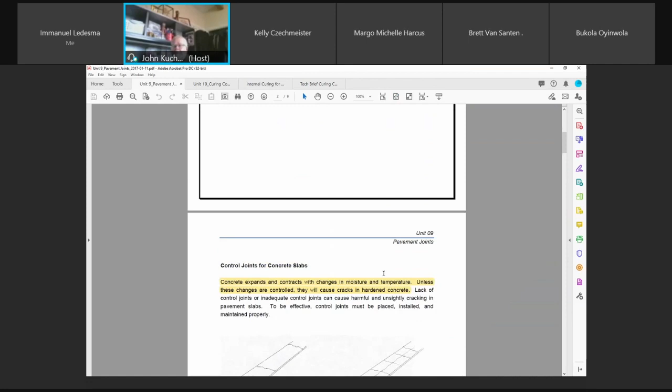We install control joints, pavement joints. Typically it's going to take a little bit of time from when you place that concrete to when you cut it. But also, the next unit we're going to cover curing. You should start curing immediately when you can, because as soon as you place that concrete, it's starting to harden. Remember, hydration takes place as soon as moisture and cement come together.

You'll see this many times. I've noticed this last year and the year before, we did some sidewalk repairs in our small community of St. Adolphe, and I saw the contractor placing concrete sidewalks. Some sections would be maybe 100 feet in length, 30 meters, and then he'd jump to the other part of the sidewalk that needed work, because they didn't replace all the sidewalks, just the ones badly deteriorated. But he had long sections of pavement, sidewalk pavement if you want to call it, and he didn't cure till the end of the day.

That's a no-no. You've got to cure as soon as possible after you're finished. It's starting to shrink, and you want that moisture in there, and it was a hot day. You're getting a lot of moisture loss out of your pavement due to evaporation, whereas you want it in the concrete to hydrate, to react with the cement and create strength. If you ever see that, they should be corrected soon, but in a small town, the superintendent here, I didn't even see him around half the time, so who knows.

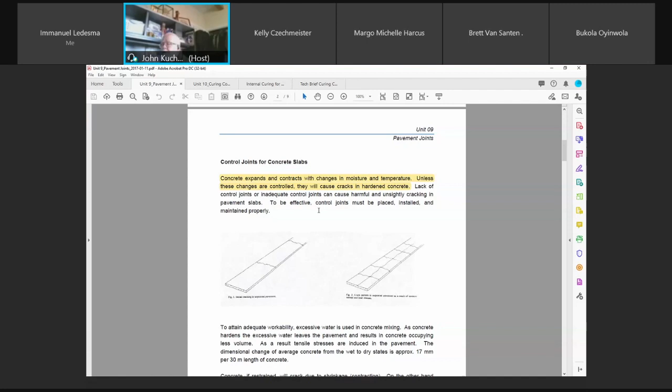Concrete expands and contracts with changes in moisture and temperature. Unless these changes are controlled, they will cause cracks in concrete. You can see here in this sketch, it's restrained along its length, so it wants a volume change, and it's got to let go somewhere.

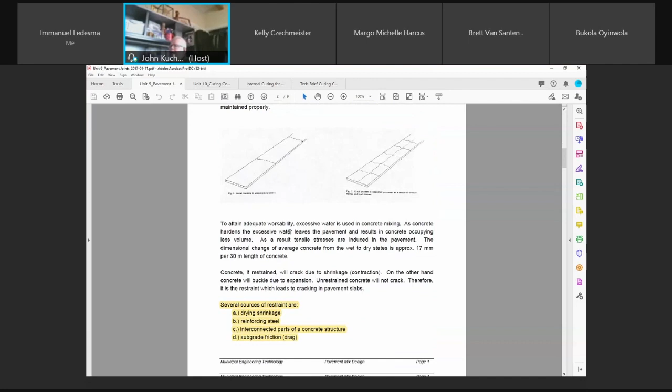To attain adequate workability, excessive water is used in concrete mixing. Based on your last quiz, not too many people got that right—they told me it's great for hydration, but remember, all you need is about a 0.25 to 0.3 water-cement ratio for hydration. The rest of the water is for workability. So that excess water is there to be able to place and finish the concrete.

So you're going to have excess water. And if it evaporates, some of it is obviously going to hydrate with the cement, and you're going to get volume change, and you're going to get cracking. As a result, tensile stresses are induced into the pavement.

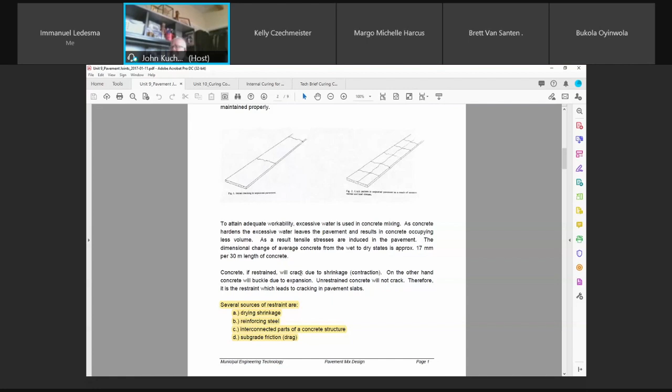The dimensional change of average concrete from the wet to dry state is approximately 17 millimeters for every 30 meters of length. 17 millimeters is about 5/8 of an inch if you're comfortable in imperial, and 30 meters is about 100 feet—so a little more than half an inch per 100 feet. That's a lot. Concrete, if restrained, will crack due to shrinkage, contraction.

On the other hand, concrete will buckle due to expansion. Have any of you guys ever noticed this on a hot day—well, a cloudy hot day is good then, right? Not overly hot, though. Keep in mind high temperatures aren't very good either, because it's going to dry out and suck the water.

But definitely cloudy, cool days are better. And if you have a cool day, you're not going to have a very high relative humidity usually. Cloudy is better, and less wind—no wind—is better too.

So some of you may have been driving home from work or from college, and sometimes you'll see the curb just kind of buckled up. You'll see sidewalks or the sacrificial strips along the median. They'll put concrete pavement there to prevent the grass from dying, because usually the grass on the median or boulevard right next to the curb is shot due to the salt and sand thrown there during de-icing in winter, and vegetation doesn't want to grow there.

So if you've got a median, they'll put concrete almost like a sidewalk—but it's not meant as a sidewalk on a median. That's to prevent the grass from dying from the salt that's thrown up too close. I call them sacrificial strips because you're sacrificing the concrete.

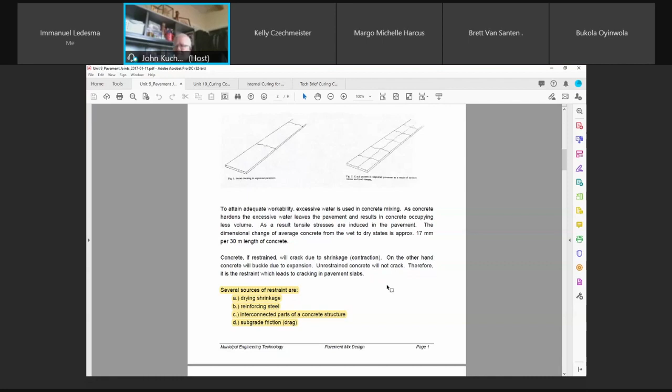Several sources of restrained cracking: restraint from drying shrinkage - anything that dries has to change volume. Reinforcing steel - you're looking at concrete, you're looking at steel, both have different thermal coefficients of expansion. The concrete is being held by the steel.

Many times you'll notice cracking in a regular pattern. And if you look at that pattern, it's probably because of reinforcing underneath it.

Interconnected parts of a concrete structure - you've got an old structure, you pour new concrete up against it, it'll crack. If you have one crack on that existing concrete - say this is an old pavement and you widen your driveway, for example, and you pour a strip because you want to widen it now for 2 cars parking. So you pour a concrete strip here, and this one has cracks, let's say. If you don't put a joint where that crack was, you're going to get reflective cracking across.

The next time you get a chance, go through the exit of building B, just underneath the walkway by building J - you'll notice some concrete pavements by that parking lot that have expanded over time. You'll notice one slab has different joint patterns, but from the existing slab, the main slab that takes you up the stairs, the crack comes right across. So if you're ever at the college or walking downtown, look at the joints, look at the streets, look at the pavements, and you'll see the cracking. So you've got an interconnected part of a concrete structure, and it just jumps across.

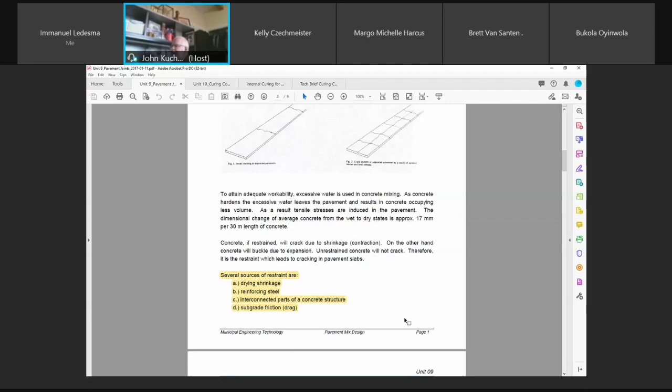The amount of drying shrinkage can be reduced. I was going to put a couple of these questions on the last quiz, but I figured we never really covered it. But knowing mix designs and knowing why we use less sand, more coarse aggregate - obviously for strength, but also to reduce shrinkage. The more sand you have in a mix, the more water you need, right? More surface area means more water, more shrinkage. Less water, less shrinkage - you yourselves know this.

Use as low a water-cement ratio as possible. But then you may have problems with workability, so you come up with water reducers, high range water reducers. By the way, some of you on your quiz stated super plasticizers as one of the admixtures, and you also stated water reducer as an admixture - well, they're one and the same, so you didn't get a mark for it. Super plasticizers are just high range water reducers.

So you've got regular water reducers, low range, WRDAs as we call them - water reducing admixtures - and you've got the super Ps. Then you've got the exceptional flowable super Ps that give you flowable concrete, where you don't even have to vibrate. Anyway, you want to use as low a water-cement ratio as possible, and high range water reducers - same thing. Use a minimum percentage of fine aggregate, we covered that. You want clean, well-graded aggregates. Water reducing admixtures will help reduce the amount of water you use, and use low slump concrete.

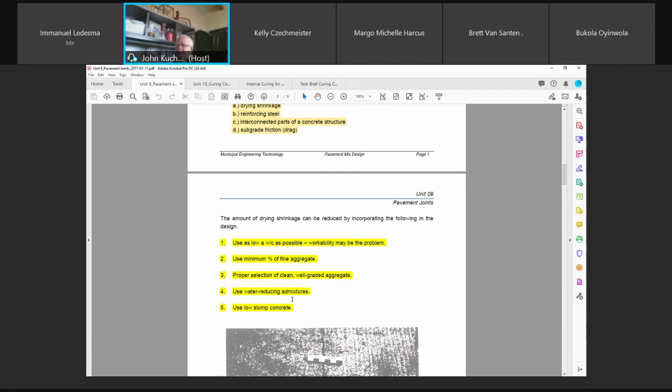True - for example, in highway construction, if you're going to use a slip form paver, you're probably only going to be looking at a maximum slump of about 25 millimeters. Anything wetter than that, the concrete is going to start slumping up the back of the paver - you don't want that. Remember, with a slip form paver there's no forms on the side, it just extrudes the concrete.

So this is a bad picture. It's supposed to just show a typical joint in pavement, but we'll have other ones, okay?

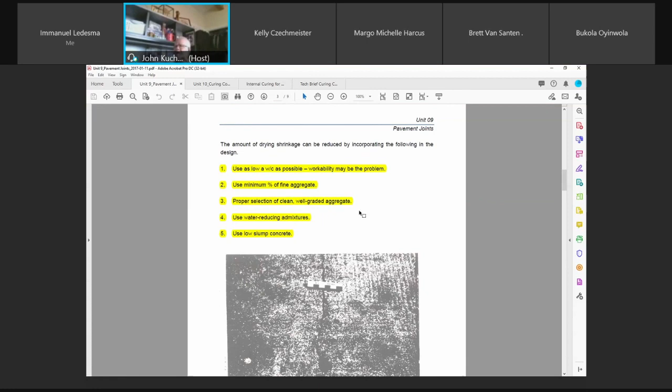So these are the sources. We looked at the sources of restraints. Now we can look at ways of decreasing the amount of drying shrinkage. Okay, so there's five elements there.

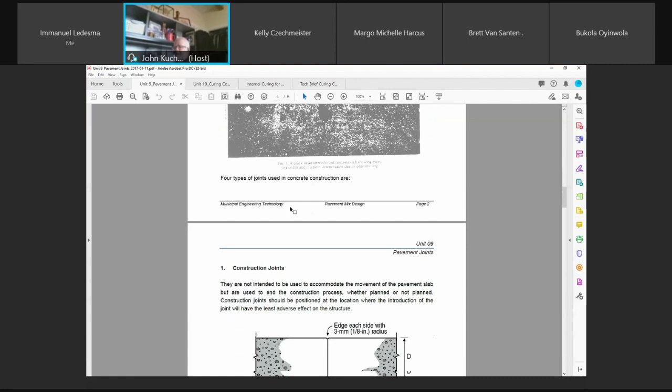Okay, we're going to look at joints. There's basically four types of joints. Construction joint, exactly what it states.

If you're casting a concrete driveway and all of a sudden it started to rain, and you said, hey guys, let's put a bulkhead in here. We'll stop, we'll continue tomorrow when the weather's better. So you're going to put a construction joint in there. You're going to put a bulkhead in, a form. You're going to pour the concrete up to it, and you're going to finish off what you poured that day or placed that day. I hate using the term pour, and I use it quite a bit because it's accepted. To me, if you say you poured concrete, it sounds like you were pouring it so exceptionally wet.

Placement, it's the same thing with asphalt. Okay, we pour concrete, yeah, we do pour concrete. But to me, every time I look at pour, I figure, oh boy, the guy's pouring soup, he added way too much water to the mix. You place the concrete, it's a little different. But anyhow, you're placing concrete, you put a construction joint. That's exactly what it is. It's like a butt joint.

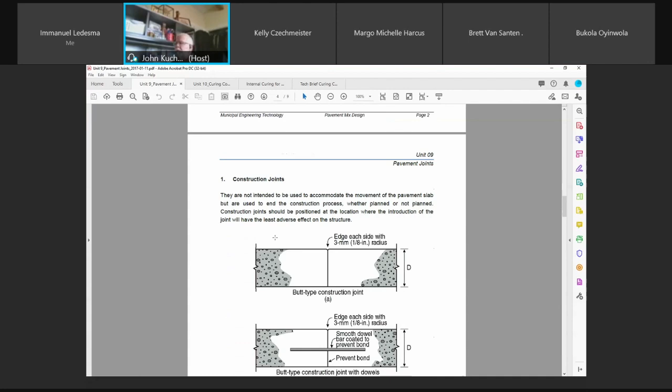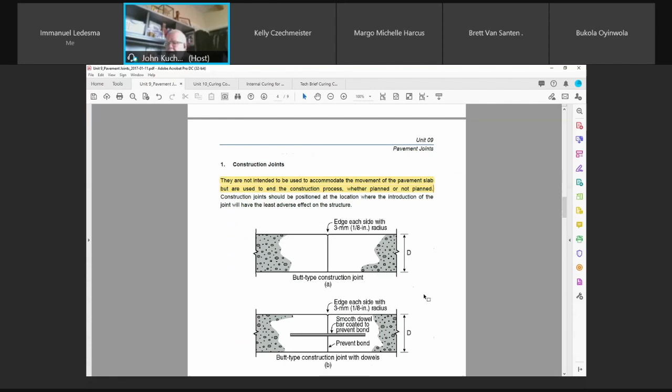Sometimes they can be connected, tied together, sometimes not. They are not intended to be used to accommodate movement. You can highlight that also on yours. They're there, they're not a control joint. They're a butt joint, a construction joint. At the end of the day, you can tie them together.

Here's a butt type construction joint with dowels. Okay, so you're going to set up a form in here because you're finishing for the day, and you're going to have a hole through your form. You might just put a wooden bulkhead, and you're going to have your dowel going through it. So the next day, you strip the form work off here, and you can continue. But here you've got a solid reinforced or tied butt joint.

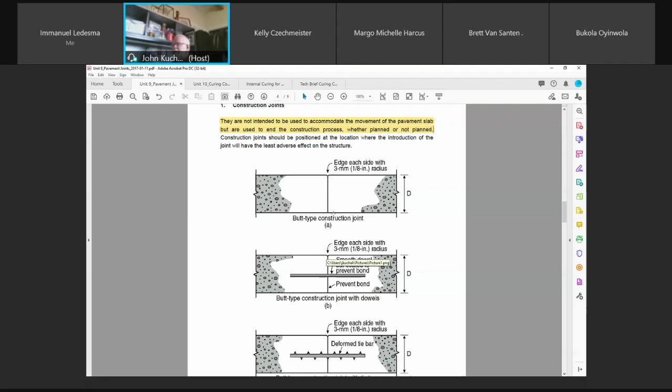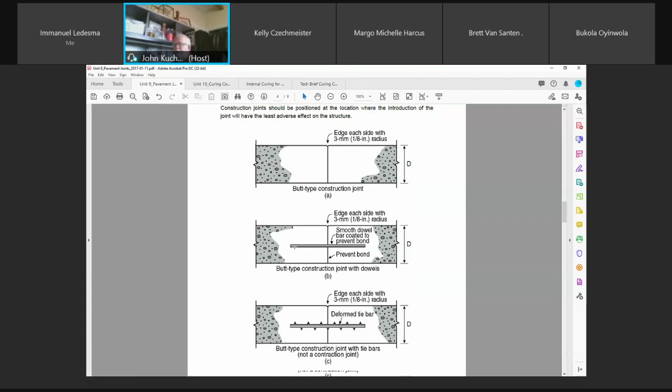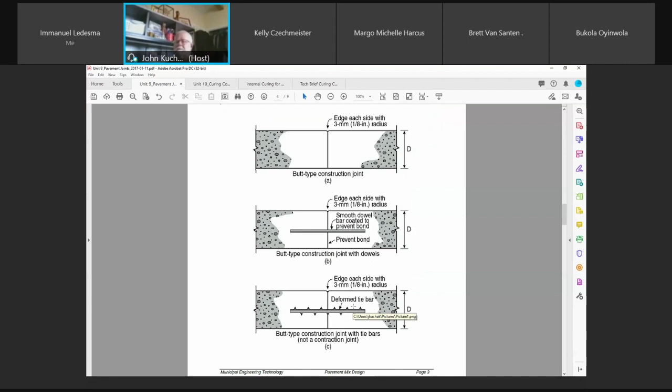Okay, it's a smooth finish, and because you don't want it, you're going to have a smooth dowel to prevent bond. Okay, if you've got a dowel in there, anyhow, this is a smooth dowel. This one down here is called deformed, and that's the one that has the ribs. You've seen smooth dowels that are just a straight round bar, and then you've got the one with the spiral running around the perimeter of the dowel. Okay, and these are deformed bars.

These tie it together, it's not a contraction joint. It's not, you don't want it to open up. You're just tying it together. Okay, you'll see this, sometimes they'll form that with an edging tool. A lot of times they'll just cut it after. But anyhow, just to keep the joint space. So this is a construction joint.

Construction joints should be positioned at the location where the introduction of the joint will have the least adverse effect on the structure. So a lot of times when you're placing concrete and you're going to finish it for the day, you're paving highways, you're going to do maybe a kilometer today. We say, yeah, we'll do a kilometer today. Already you're planning where you're going to be ending off. Okay, you want to put that construction joint in its place. You don't want to have a joint two feet from a control joint. Okay, so you kind of plan already. And so these are called construction joints.

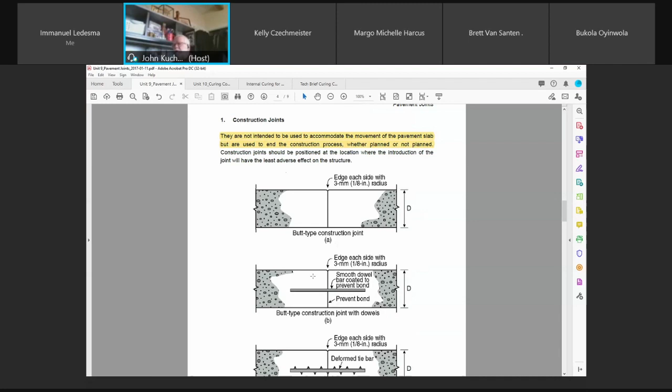This one here, I believe, was taken out of the city of Winnipeg. You may or may not see this many times now. Keyways, okay? When the concrete is formed, they'll have slip-form pavers that can actually do that on its own, or they'll put it into their form. In other words, if you were going to be forming the concrete, you would nail a nailer strip there so that the next concrete, you have a section. This is going to prevent upward movement, okay?

It's a keyway. Reinforcing will prevent that also. So some you'll see will do both, a keyway with a dowel. Sometimes you'll just see the old keyway. I don't see too many keyways now. It's basically just reinforcing steel. But here, this is it.

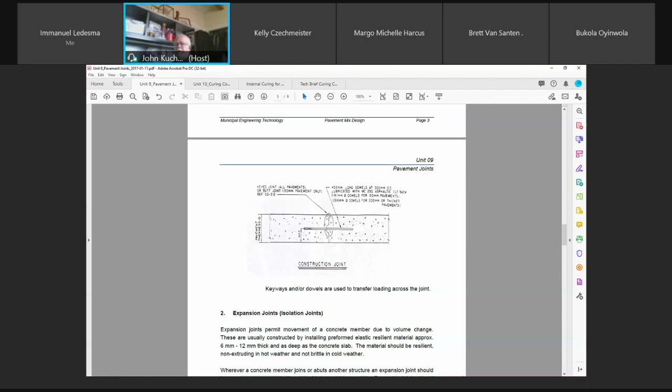And again, these pavement joints are usually going to be cut and then filled with a sealant to prevent intrusion. Okay.

Construction joint. Expansion joint, isolation joints. You don't see too many expansion joints in concrete pavements anymore because of the spacing of your control joints. If you put an expansion joint in, that means it's going to open up a contraction joint somewhere. Isolation joints are if you want one slab of concrete to behave independently of the other one.

In other words, your driveway leading up to your garage floor - how many have got their driveway tied into the garage slab? Anybody? Can you remember? No one would, but yet I've seen it. They say, well, I'm going to tie my driveway to my garage slab so my driveway doesn't pull apart. You're right, no one would. I wouldn't. Why do it?

You're going to have two different movements. You're going to have cracking there. Your reinforcing is going to restrain it. It's got to let go somewhere, and the concrete's going to crack. You want them to move independently. So if I'm pouring my concrete up to my driveway entrance, I would put a bond breaker in there - what a lot of people used to call buffalo board, impregnated asphalt fiberboard. You've seen that. You place it in just a little bit below the surface, and you can run a bead of caulking in there after. So it's independent - you don't want to tie it together.

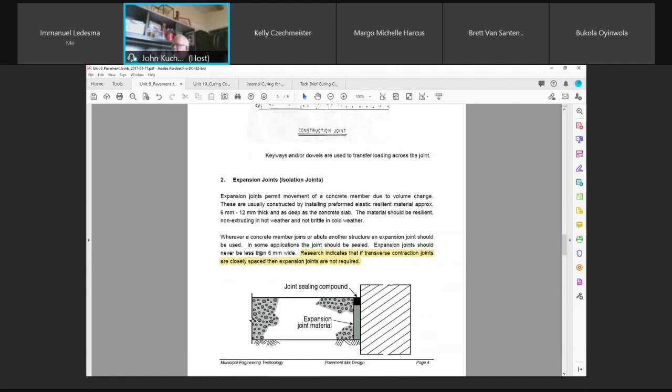These are usually constructed by installing preformed elastic resilient material, or fiberboards as we call them. Here's a sketch of it - here's concrete that's existing, and you're placing a driveway or pavement. You're going to put that bond breaker board in there, and then you're going to seal that so the moisture doesn't get in and play havoc with it.

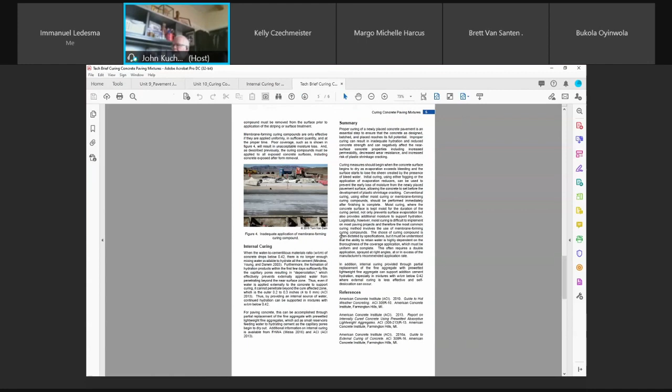Research indicates that if transverse contraction joints are closely spaced, then expansion joints are not required. In one of these articles, the tech brief I put up here for you guys - this one, on internal curing. There's another research one that actually shows the same thing: if you've got properly spaced contraction joints, then expansion joints aren't needed.

Then isolation - expansion joints can be different than isolation joints. Expansion joints might be every fourth or fifth joint, like they used to do in a sidewalk. If you've been walking down a sidewalk in an older part of Winnipeg, you'll see maybe every fourth or fifth joint has a fiberboard, or some will just put a piece of plywood in there. Then you'll have another 4 or 5 slabs, and you'll see that fiberboard sticking up again. Well, that's an expansion joint, but you don't need it.

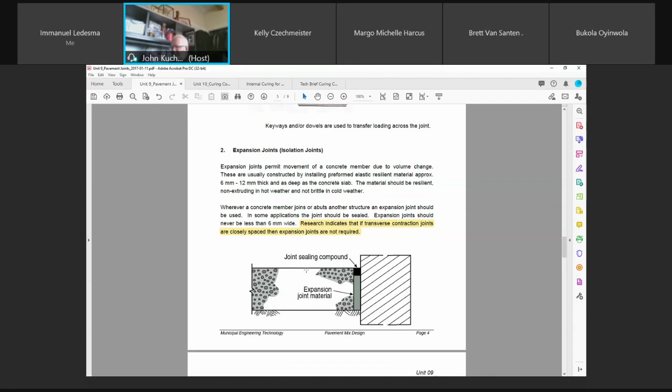If your contraction joints are properly spaced - remember, contraction joints move both ways, contracts, expands, contracts, expands - then expansion joints are not required, and that's why we don't use them anymore. You hardly ever put them in now. An isolation joint, yes - you're allowing expansion of this concrete slab to expand and contract without influencing your existing structure or existing concrete. So that's an isolation joint.

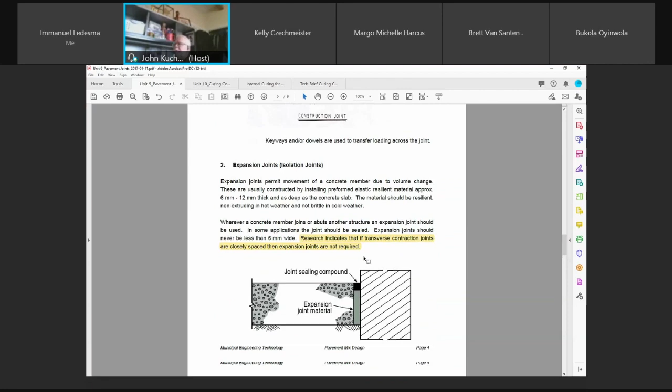Contraction joints - these are the ones we saw cut at 3 meters, 4 meters, whatever. These joints are used in long lengths of pavement slabs placed in one pour or one placement. They provide a weakened plane to induce cracking - you're telling it where you want it to crack. They're also called dummy joints. You may look at it and think that's a dummy joint, but one of them could have been a construction joint - you don't know from the surface.

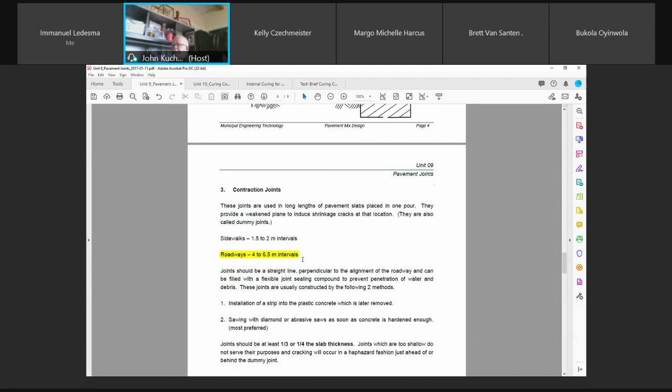For sidewalks, usually 1.5 to 2 meters. Roadways, 4 to 6.5 meters, depending on the width of your pavement. How many of you have noticed parts of Highway 75, or maybe the older parts of Highway 8 and 9 - highways got their contraction joints, but on a skew, on a diagonal. Instead of going 90 degrees to the longitudinal, they swing out maybe 30 degrees, 60 degrees, not quite 45, but maybe 30. Anybody notice that on Highway 75?

Hey John, what's the big difference on 75, like on our side of the border opposed to the state side? What's the big difference, money? Yeah, probably. You're talking that their pavements seem in better shape or what?

Their interstates are immaculate compared to our highways. The states are really, really proud. After World War II, the states started to rebuild, and they started the infrastructure, the highway network started to increase. People came back, money was good, people were well off, they were buying vehicles. And they decided to really put money into their interstate, and they still do, their infrastructure.

Their way of construction, I mean Grand Forks, North Dakota, South Dakota, weather conditions are very similar to us here, but they do things differently. They put the money in. They started recognizing drainage, I think, a lot sooner than we did. So they put a lot of drainage into the pavements, consideration into pavement. They also put in earlier rehabilitation for the load transfer dowels.

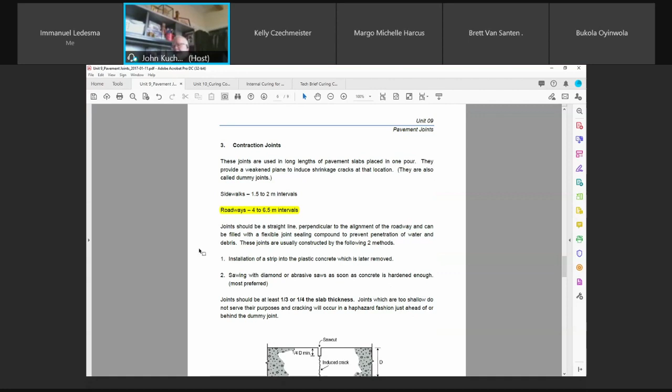Hey John. Yes sir. You were talking about the control joints that weren't perpendicular. Did you end up answering that question? Because I know number one highway is also like that.

Yeah, highways did it, and it's not a bad thing, but now they're getting away from it. You ever hear road chatter when you're going on a long trip? You always hear that burp, burp, burp, burp. It'll put you to sleep if you're driving for a long time, right? It's repetitive because every joint is the same, especially if they didn't stagger them.

So what's also happening from that respect, the other reason is that one wheel only crosses at the same time. So when you're starting to load a slab, only your front wheel, say your right wheel if you're going southbound, will cross first, then your left wheel, same with the back ones. So you're loading and unloading a slab with less weight, plus you're not getting that repetitive hum.

And that's why highways, even on number one and elsewhere, you'll have a 3 meter spacing. Then you may go to 4 meter spacing, 5 meter spacing, and then back to 3, 4, 5. It breaks up that repetitive hum, okay?

But also they used to put it on a skew, believing that, and there was some truth to it, that you're not loading the slab totally with the whole front wheels, and the next wheels, and the next wheels. You're distributing the weight a little bit, from one slab to the other, but not such a great amount because only one wheel is crossing, then the next one, then the next one. But you'll notice they didn't do that at CentrePort. They just went straight 90-degree cuts to the longitudinal.

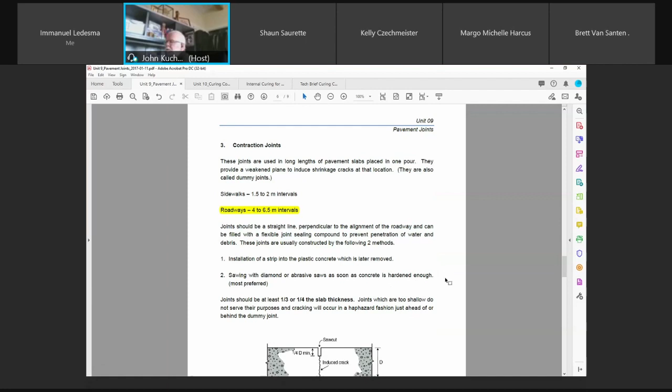I don't think it's a bad idea. You don't see it anymore in new construction, at least. I think highways took it out. They used to do it all faithfully all the time.

That explain it? Okay. Joint should be a straight line perpendicular to the alignment of the roadway and can be filled with a flexible joint sealant.

And you'll see that. The guy places the concrete, and you'll see that as you're placing concrete, especially if you're placing concrete for 10, 12 hours a day, you start at 6 in the morning, and everything's going good, you've got good delivery, there's no hang-ups, there's no delays, you're just moving along at a nice pace, and you'll see that the night crew, if you want to call them, comes out.

At about 5 hours, you'll see the guy drag out the big pavement saw, and he's already walking on the pavement, checking it. He's looking down to see if he's putting his footprints in it. He's ready to start cutting. He brought the crew, so he wants to start cutting that pavement, even though they're still placing concrete further ahead.

And that's the key. If you pour a concrete driveway on a Friday, and the contractor says, okay, I'll come back Monday and cut it, tell him to give you a credit and not to bother. Too late, too late. Concrete's already got 2 days of shrinkage. It's got to let go somewhere.

Yeah, he may be cutting at 8 o'clock, 9 o'clock at night. If you poured Friday morning, you poured a nice double wide driveway, 50, 60 feet long, say 20 meters, whatever the case may be, if he's not cutting it, if he's not checking it within 5.5, 6 hours, again, depending on the ambient curing conditions, hot, cold, sunny day, windy day, then you want to cut it as soon as you can get on it. You want to relieve the strain.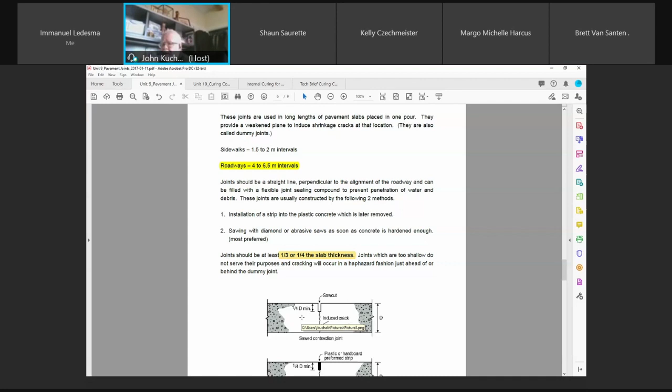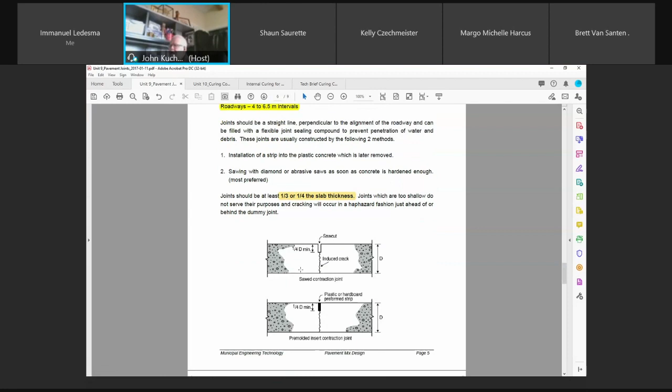These are epoxy coated rebar, which to me is garbage, but everybody thinks it's the next best thing to sliced bread. To me, epoxy dowels aren't any better than non-epoxy dowels, and yet you'll see the city placing them everywhere.

Because if you don't, you're restraining the movement. So you'll cut these, okay? And you can see these assemblies have been sitting probably outside in the rain, or they got a little bit of flash rust, but it's nothing serious.

Dowels must be fabricated and installed in a manner that permits the joints to open and close with slab contraction and expansion. This is typically accomplished with a relatively smooth dowel surface and generally requires the application of a bond breaker. So you'll notice that a lot of these bars, if they don't come from the factory with a lubricant, or if they've been sitting too long and that lubricant dries out, the contractor will have to lubricate these again, because you don't want these to bond.

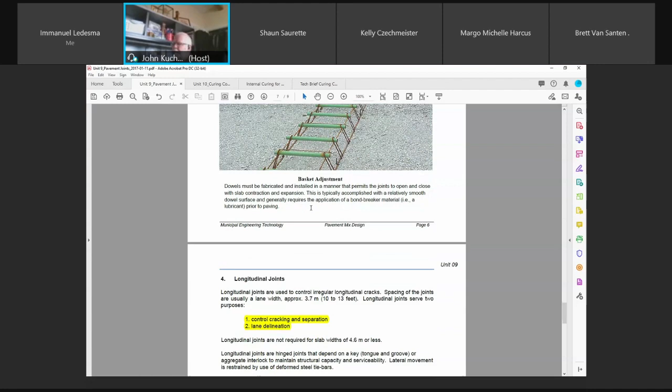All that reinforcement does is transfer the load, because you don't have the thickness here to allow the crack to transfer load through aggregate interlock, or crack interlock, from one slab to the other. So you'll see these put out, and there'll be marks, so when the contractor places the saw, like these were in first, he knew where to put the saw, so he cut that right down the middle. These are pretty straightforward now. When the guy's placing his saw, he knows it'll just come right across, same one.

Okay, longitudinal joints. This is the longitudinal joint, it divides the lanes. And there's two reasons why we do it. You want to control the cracking and separation. So in other words, if you're paving and your slip-form paver is really wide and you're pouring 2 lanes at once, you've got to cut that longitudinal joint. That's to control cracking, because concrete is also going to shrink both ways, widthwise and lengthwise.

And if you're pouring 2 lanes, you want them together, because sometimes you've seen where the longitudinal joint has opened up, and there were sections on Highway 75 where it opened up so much that we had differential settlement. So if you were on a motorcycle and you hit that longitudinal joint, I think you went over tea kettles.

Would you only grease half of them? Yeah, some will grease half, which still allows pavement to move. In other words, the dowel will move with one slab, but not the other. Some will grease both, so it just lays in between, sliding along. If you only grease one half, that's the side that's not bonded, so the dowel will move with the other slab.

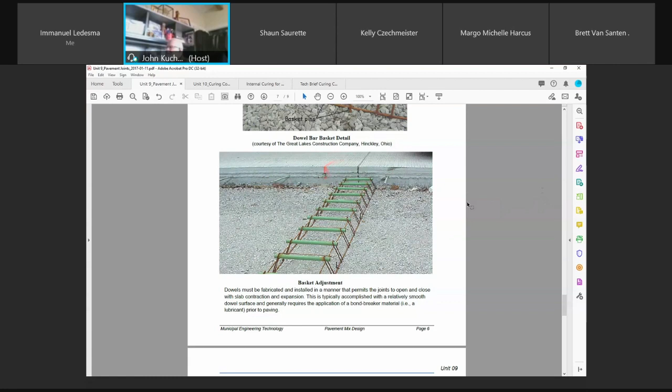So now we have two reasons: we control cracking and separation, but also if you'll notice, your lanes are usually set up on joint spacing between the longitudinal joints. So if you've got 4 lanes of highway, or 3 lanes of pavement, usually there's a longitudinal joint between the lanes, so it's for lane delineation.

And where there's a problem, a lot of people, when they don't see their white lines, rely on these joints. But then get down to Kenaston by IKEA, where they did a major rehab, they've got about 5 lanes going, and there's no real lane delineation because some lanes are wider, some are narrower. So people driving in there, if they don't see those longitudinal joints or they're trying to follow them, end up hugging 2 lanes. So I think sometimes we rely on this too much, but it is...

It guides your vehicle. So control of cracking and separation, and lane delineation, two functions that the longitudinal joints give you. Longitudinal joints are not required for slab widths of 4.6 meters or less, and if you have a single driveway, basically one lane...

You did road profiling after diamond grinding and it helped. Okay, yep, the roughness index decreased. What did you guys use, a road profilograph or a dipstick?

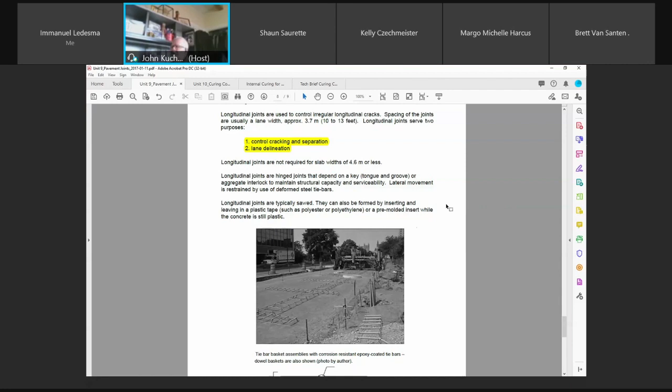Okay, good. So again, longitudinal joints are hinge joints, a key or a tongue and groove if you want to call it. Here you can look at the typical orientation, you can see your longitudinal joint going in, and your transverse assemblies. You may sometimes have a manhole in the way, or a lamp standard, making it a little wider, whatever the case. But here you can see your string line, the paver follows it, the slip form paver placing concrete.

These are already pinned into place ahead of time. So the concrete is deposited and it can, okay. Longitudinal joints are typically sawed.

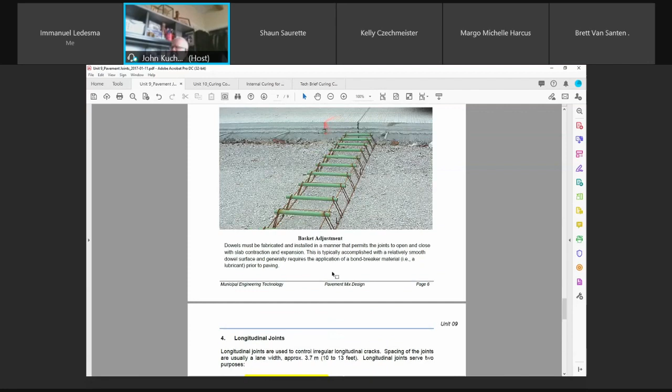They can also be formed by inserting and leaving in a plastic tape, though that would be pretty hard to do on a longitudinal. Now they've got these slip form pavers that will insert the dowels themselves. They'll insert these dowel baskets. Actually, what they really do is they don't insert the basket, but as the paver comes across, all of these dowels are then pushed into the pavement through the surface, and then the vibrators behind it make sure that it's all vibrated in and closed.

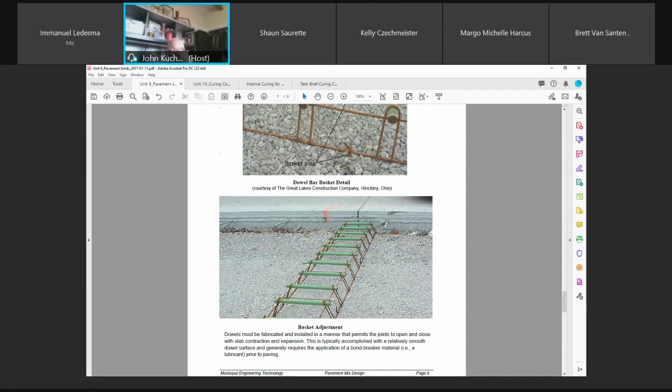So this operation goes before the vibrator in the slip form paver, because the slip form paver places the concrete, front augers keep it level, it goes through the machine, vibrators consolidate the concrete. But in this case, it's going to consolidate after these bars are pushed in. So those are called self-inserting pavers.

And they'll also do that to the longitudinal joint. It's programmed so that as the machine is traveling, the longitudinal joint gets dropped in, and another one comes around and gets dropped in, and as it's moving, another one comes and it's dropped in. So they all have to be systematically timed, these machines, such that you get the proper spacing.

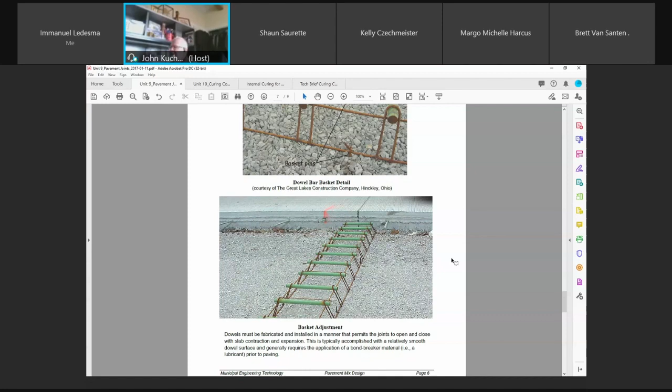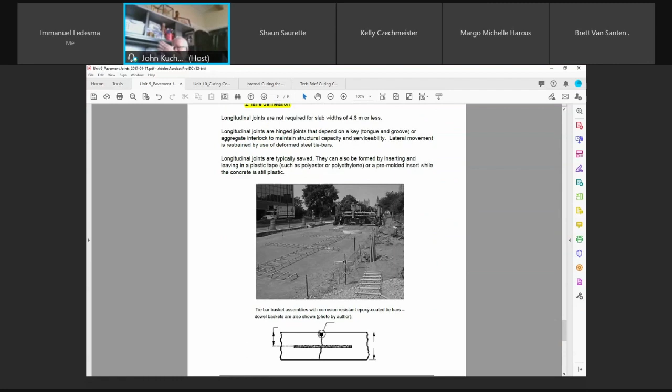You can always go with ground penetrating radar afterward and scan the surface of the concrete to see if these dowel bars are in the proper place. MI has a system like that for doing it. So again, the equipment is getting more automated, so a lot of this doesn't have to be done ahead of time anymore. It does as one operation. So these slip-form pavers are pretty fancy machines, some of them, and they can do a lot.

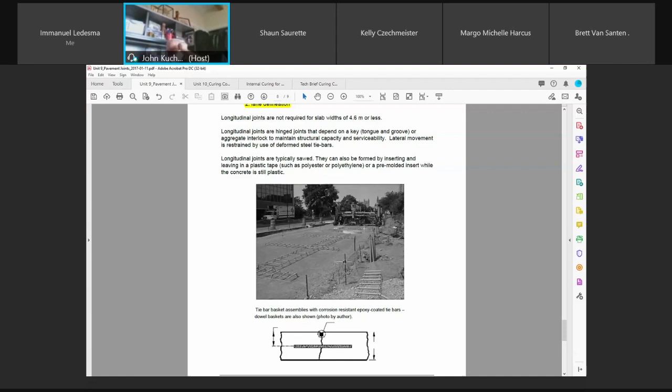So, self-inserting slip-form pavers. And again, here's a typical tie bar basket. Now your longitudinal joints, these tie bars are going to be deformed, because you want to tie the two halves of the pavement together. The dowels are smooth bars, because you want the pavement to contract and expand at the control joint. The longitudinals, you want them tied together.

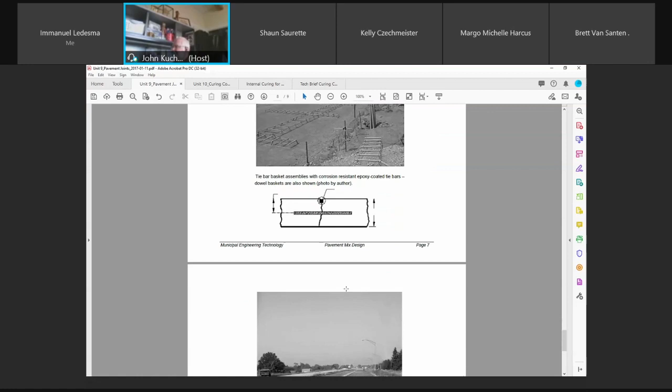And here you can see another sketch which shows a continuous length. Now you can see here, usually there's room on the side.

This is where the paving truck can back in, the revolving drum mixers, or the dump truck. If you're using a dump truck, the paver will have a bucket where he can move it over and then dump it. If you're using revolving drum trucks, he'll come in, swing his chute out, and they're usually pour from both ends, making sure he meets halfway with the truck on the other side. Plus you've got that auger in front of the screed of the slip-form paver, which levels the concrete back and forth uniformly. So you'll see there's got to be room here for the trucks.

At CentrePort, we were restricted. So as we were pouring, these guys had to quickly slam these into place, pin them down, cut them, then we paved up to it. And as we just got past it, they put the next one out, because the ready mix trucks were backing in and they had no room on the side. So they actually had to travel down the grade that you were paving.

Okay, so that's it for joints. We're going to take a little bit of a break here before we get into curing, but this is just a very preliminary look. There's more to joint design, the spacing based on slab thickness. Do you go with how big should your dowel bars be? Load transfer - should they be 25 millimeter?

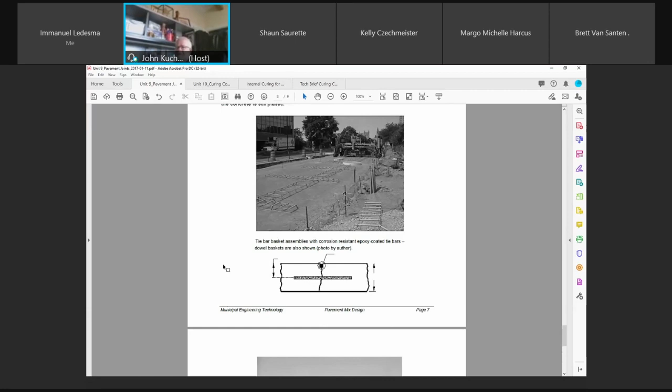Should they be 40 millimeters? Should it be 16 millimeters? Depending again on the type of pavement - is it a residential pavement? Is it a highway with 75 mph traffic? What kind of traffic, what kind of thickness? So there's also the design side of it, which we're not getting into. We're just looking at what the role of those dowels are and why we join concrete, because we know concrete is going to have volume change. And with volume change, you're going to have stresses induced, and you're going to get cracking. So we've got to acknowledge that.

There's a couple of reference articles I think I've uploaded. You may want to look at them. I can also upload more.

There's lots and lots about joint configuration, the width of a joint compared to its depth. That's very important because it depends on how the material in there works. Typically, you want bond in a joint on the sides, not the bottom.

Same thing when you're using caulking. I'm going to usually tool it below the surface so you don't rip it out. But you only want bond with the joint on the sides, not the bottom, because you need some elasticity in your caulking material.

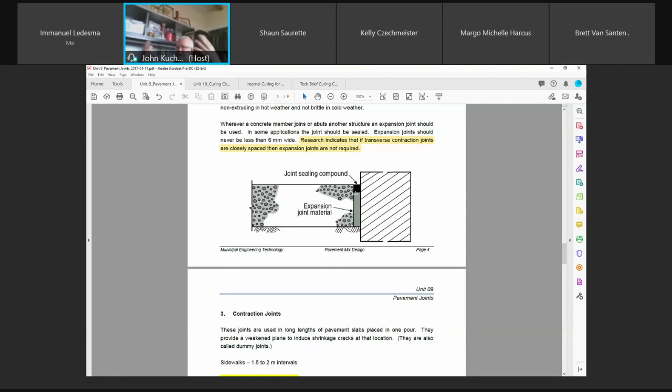Now you're looking at caulking, the manufacturer of caulking, and its performance. When I was in the restoration industry, it was important for us to know what type of caulking we're using, its elongation properties, its adhesion properties, its cohesion properties, and the width of the joint.

What's the amount of movement that joint is going to undergo? So we have to pick the proper sealant - does it have the proper elongation properties? Typically on our highways, we're using a hot poured asphaltic type of bitumen, and you'll see them gunning it out in the City of Winnipeg or even on MI. It's cheap, it's messy, it stinks like crazy on a hot summer day. It's asphaltic bitumen, but it's cheap.

Money talks - if it's going to perform the job, they'll go with the cheaper one. May not be better, but as long as it performs the job. You can also get a superior option - an Impala is going to get you from A to B, but so will a Rolls Royce. Which one are you going to pick? How much money have you got?

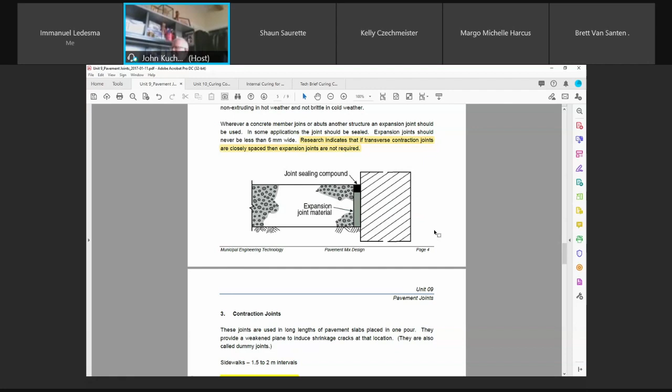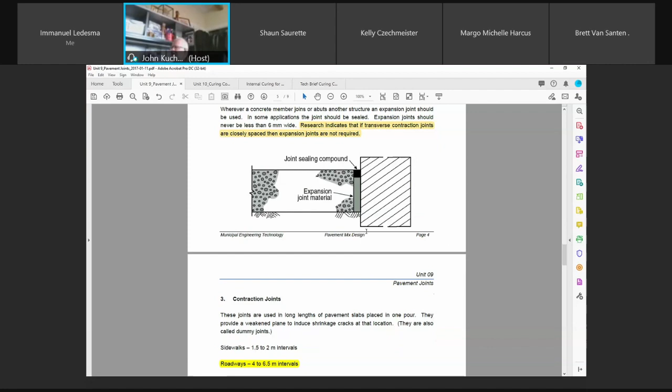Straightforward. I highlighted the key parts. We know the 4 types of joints, and we know what they're used for.

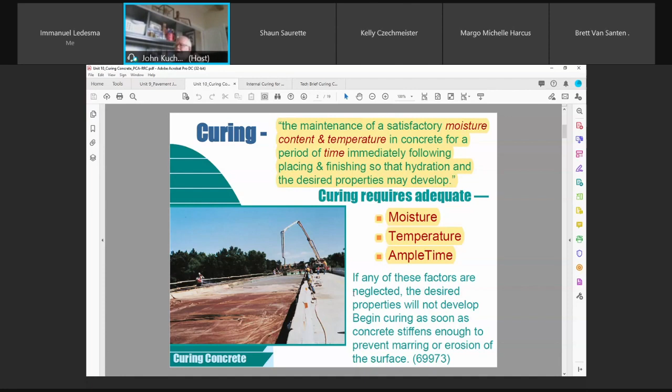So there are different methods. Curing is the maintenance—you want to have adequate moisture, ample time, and adequate temperature.

What does that do? Well, it increases the strength, the durability, the wear resistance, water tightness. We reduce the permeability if we keep curing it, because the moisture is hydrating the cement paste, and the water is hydrating, creating a gel, reducing the pore structure. Durability, abrasion resistance—we'll call it the same thing maybe. Freeze-thaw resistance, again related to permeability, and volume stability: if it dries out, it's going to shrink, it's going to crack. If you don't let it dry out until it cures and hardens, your volume change is going to be less.

So you want to make sure that you have—and I can't stress that enough—you've got to have proper curing.

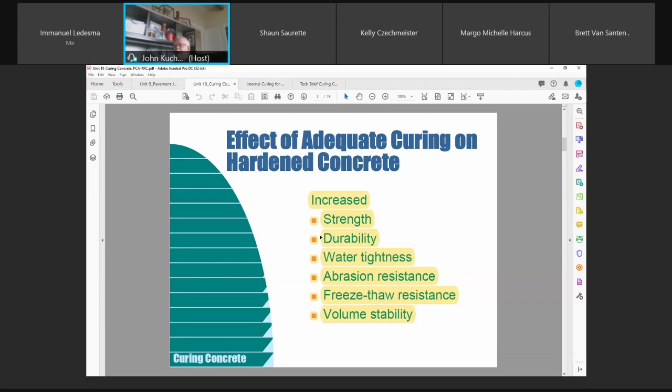Again, unless you physically go out and take cores and check the permeability, run hydraulic conductivity tests on it, do Taber abrasion tests on it with Taber dressing wheels to try and get abrasion resistance—this is more qualitative than quantitative to prove. I mean, you can do it, but you've got to run tests. Nobody does—well, I shouldn't say nobody. The research people do, the manufacturers of the curing compounds do. You've got to have data to substantiate it.

So if you give it moisture, some of it's going to evaporate, and obviously some is going to be hydrated, which is what you want. On a pavement, remember we looked at placement—you're going to spray the subgrade. You'll always see that when you're placing concrete on grade, spray the subgrade down. You don't want water being sucked out of the mix into the dry A-base. You don't flood it such that there's water sitting on it, but you've got to make sure it's moist enough that the water will not be drawn into the subgrade. Keep it in the mix, let it hydrate, don't let it evaporate from the surface.

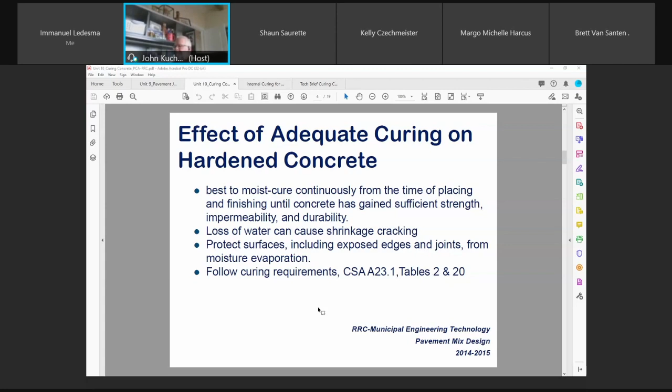My favorite, graphs. Come to think of it, that last graph, question number 35, part C—when I read it and read some of the answers, it got to me that some people were interpreting it wrong. You'll notice everybody got 1 mark. That question number 35 was worth 3 marks: 1 for A, 1 for B, 1 for C. Everybody got 1 mark for C, regardless of what you placed on it, because when I kept reading it, I thought okay, this individual may have taken it this way, somebody may have taken it this way.

So I gave everybody 1 mark for part C. A and B were worth a mark. Yes or no was half a mark, and then your substantiation.

But many of you guys did not provide me data. You made general comments, that's fine, but you didn't back it up with values taken off the graph to show slump loss in relationship to time. So you'll see a comment, if I'm returning yours, that says I need data to substantiate. I can make a statement all I want, but if you don't give me a value, show me that there's a slump loss greater with a retarding mix than non-retarded, that type of thing. So you get half for the right answer.

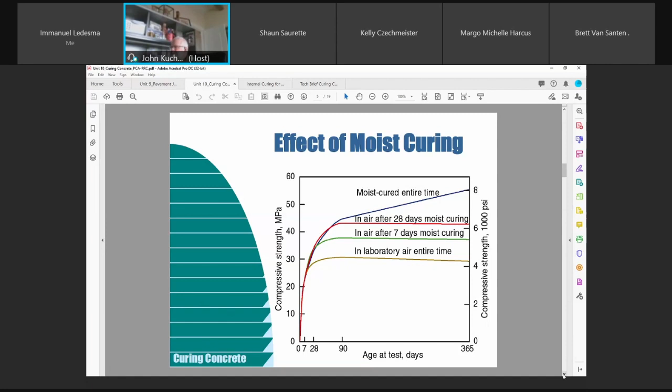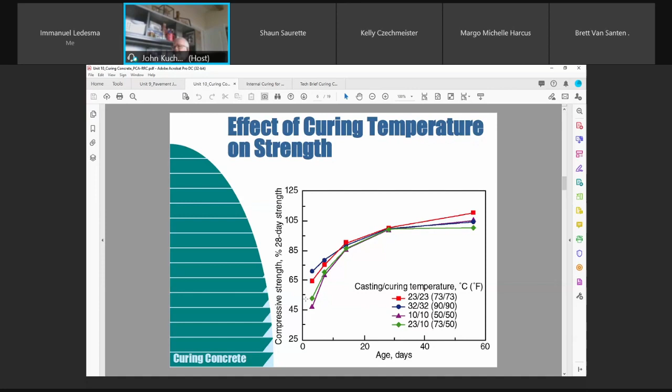So you can see how temperature is very critical for the early age of concrete.

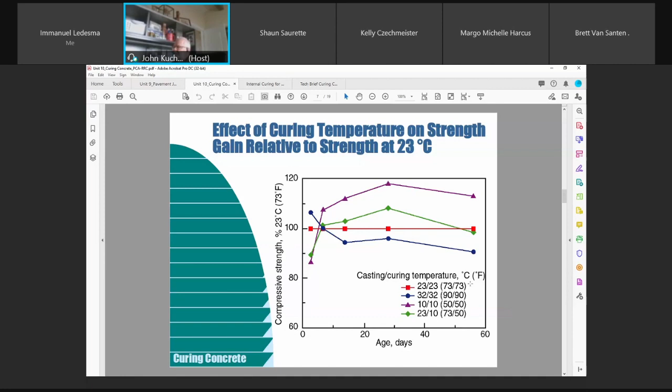They'll put that white blanket, soak it, and then put poly over it. A lot of times they'll have soaker hoses put right underneath it, and they'll have a night watchman on that bridge deck checking for moisture. He's there on night shift, staying in the field office, and he may go out periodically, even on a hot summer day and then a fairly warm evening, to make sure that bridge deck is continuously wet for 7 days. Bridge decks have a lot of reinforcing, a lot of restraints, a lot of potential for cracking. You want to cure it, give it that moisture. And bridge decks probably have high cement contents, abrasion resistance, and so forth.

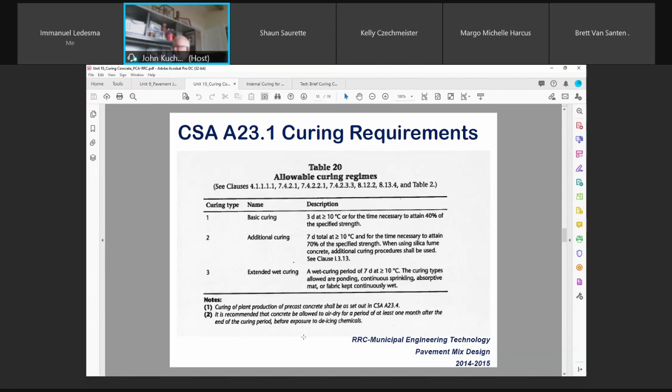Ponding or immersion, that's the best. That's why cylinders—those of you that worked in the lab—those cylinders that you bring in from the field have got to be immersed in water, a saturated lime solution, or put in a fog room, a moisture room. Okay, just one minute here.

I have to close my door.

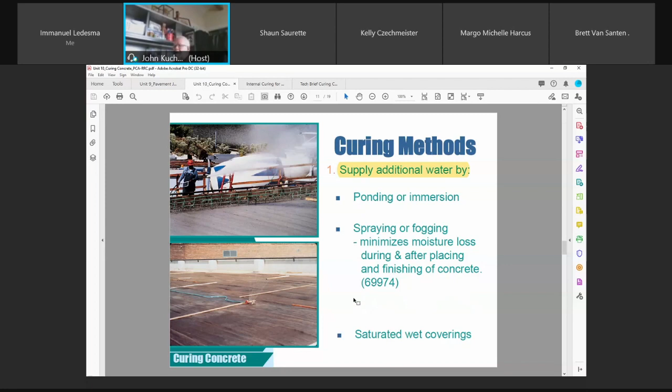Spraying or fogging, you want to minimize the moisture loss during and after placing and finishing. Saturated wet coatings, wet coverings, that's the best. You've always got them wet, you've always got moisture. You're not allowing your pavement to dry out. Essentially what's happening is you got a saturated concrete, and you're supplying external water from the outside and stopping the evaporation. As this external water is being evaporated, you give it more.

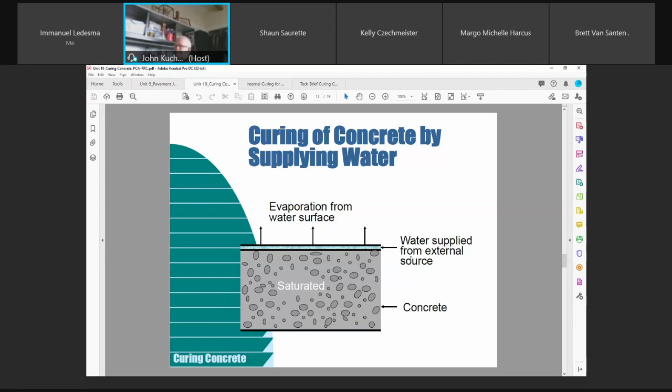Seal in the mixing water. Maybe you're not going to add water, but you're at least going to seal it in, so you're using plastic sheets. It's easy to do on a pavement or flat surface, but sometimes you get complex shapes and it's hard to do. You can see the wind sometimes get under it and start blowing it around. You've seen that happen on a lot of pavements, so it's not easy. But you want to place it in such a way that it doesn't mar the finish, especially if you're looking for aesthetics. The concrete's got to be fairly set up so you can walk on it and place these planks to pin it down. You may spray it first and then cover it with poly, and make sure all your edges are sealed so the wind doesn't grab it and rip it up.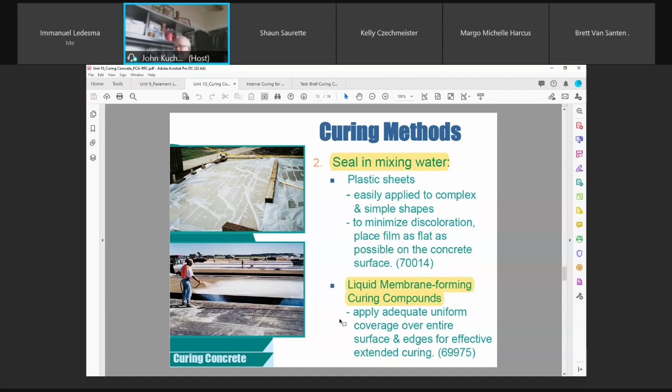Apply adequate uniform coverage over the entire surface and edges for extended curing. Got to do it. It's the same thing as you're sealing the curing membrane - it becomes plasticized, almost like a plastic sheet. But eventually it'll just wear off with traffic. You're stopping the evaporation of water.

Now this is saturated, partly because you're still going to get some moisture until it's placed. That's why it's important that as soon as you get your final finishing, that's usually the tining, you're going to broom it or tine it for traction. If you looked at that unit we didn't cover, you want to broom the surface for slip resistance. Highways usually have like a wire rake, they tine it, it's called tines instead of a broom. You might broom your driveway or sidewalk with a stiff broom, but highways usually tine, a little different.

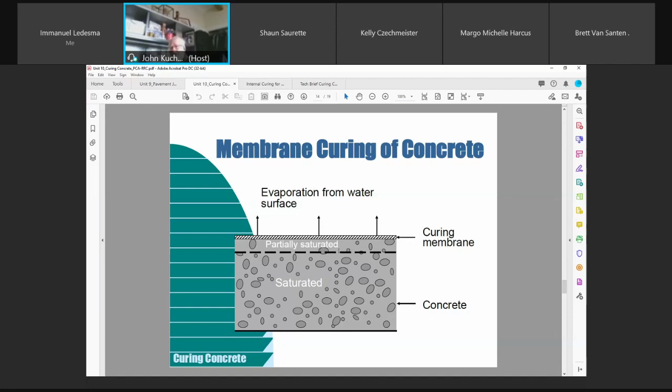So membrane curing compound, and the precast live steam heating coils, electrically heated forms or pads. Live steam is what's usually used in the precast plant. They'll put a hoarding over their structure and pipe in steam.

It's hot, it's wet. When I was at Conforce, which is now Armtech I believe, they might have even pulled out of here now. Anyhow, we just had heating coils inside the formwork, inside the hoarding on both sides of the formwork, and live steam was going through them, but the heat would dissipate. So we created heat with steam, but the steam wasn't wet. Steam was running through our heating coils to drive up the heat, and we would drive that heat up.

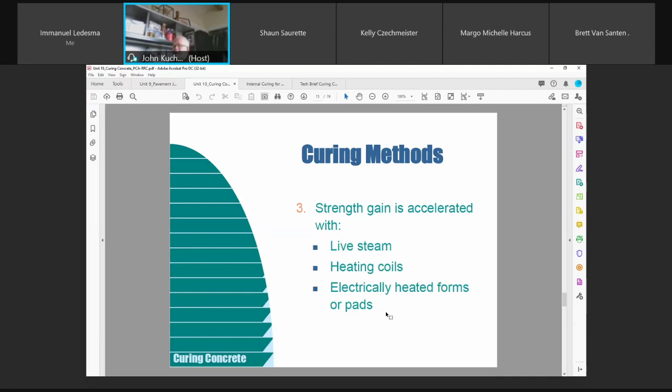But again, you've got to be careful, you don't bust the concrete. We're going to look at that right away because you want to make sure you have a certain amount of strength before you sock the heat to it, or you'll destroy it. So there's an initial curing period before the steam comes on.

Here it is, you don't have to learn this, I won't quiz you on it, but get a minute, you can look at it. You've got outside air, and then after about 5 hours after placing, that's usually when you get your initial to final set, you're going to build up enough strength, then you sock that heat right up. You're going to have a holding period where it's developing its strength, and then you reduce your heat. Steam temperature in the enclosure is held to 60 degrees until the desired concrete strength is developed.

When we were in the precast industry, we'd place a girder and they wanted to de-stress it. So I would come up with a mix that at 12 hours after casting, we would get 30 MPa, or 20 MPa strength, so that when they released the pre-stressed cables, the concrete would hold without busting up. But if you put the steam on too early, you would actually stop that strength development. So there's got to be an opportune window. I would have to develop setting time tests for the concrete mix I developed, and then tell the floor people you cannot turn on the steam until 5 hours after. That means the night watchmen at the plant, the stationary engineer, would know that at 10 o'clock tonight I can crank up the heat, not until.

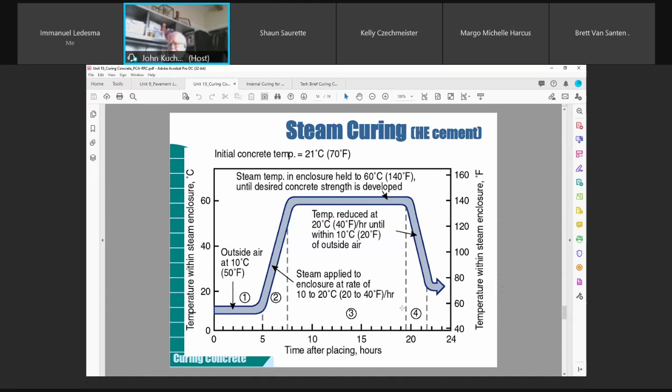Strength versus curing temperature. This is interesting, this is what I'm saying. At 1 day, if you're curing at 50 degrees Celsius, you've got, say, 16, 18 MPa, maybe 15, whatever. But at 28 days, the strength drops if the curing temperature is too great.

And this is what the precast needs. They don't really worry too much about here, they want their initial. So here's a good graph. At 10 degrees, you're going to get good strength at 28 days. But the initial temperature drives your early ages up, but it starts to decrease at 28 days if your temperatures are too high.

And that's why in the field, of any of you guys that have tested concrete, you need initial curing temperatures between 15 and 25 degrees for your test cylinders for your initial 24 hours when you set them up in the field, and you go back the next day to pick them up. Then you're going to put them in a moisture environment in the lab at 23 degrees plus or minus 2.

So 1-day strength increases with increasing curing temperature, but 28-day strength decreases with curing temperature. It's kind of a reverse curve. So if you need early strength, temperature above your typical curing temperature is going to help you, but it'll decrease your potential for 28-day.

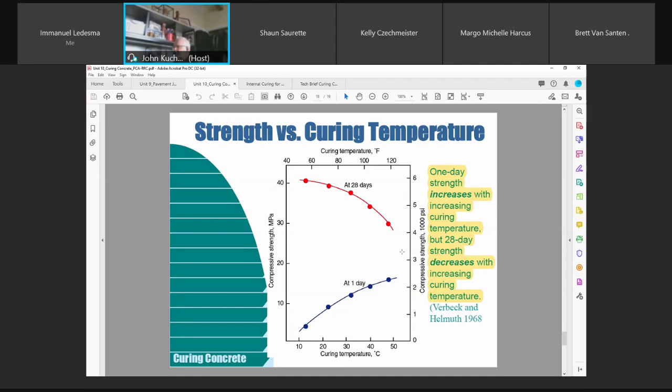Any questions so far? That's a good graph, guys. Read it, understand it.

And then there's also penetrating sealers, where you can use either silanes or siloxanes. These are sealers that are basically more water repellent. You wax your car and it rains, and you'll see how the water just kind of beads off your windshield or off the body of the car because you got a nice coating of wax on. Penetrating sealers will penetrate the surface, but not very deep, and are more of a water repellent, but will prevent water from intrusion into your mix, into your concrete.

So a penetrating sealer will also help to seal some of that moisture in so it doesn't come out. This will typically be used a lot of times for concrete, more as a maintenance item later on, because we know that there's still moisture in the mix that may not have hydrated. So let's add a penetrating sealer to keep it in there if we can. This is a hardened surface, they're penetrating through the existing pore structure. There's different types, there's silanes, there's siloxanes, getting into a little bit more about chemistry on the sealers.

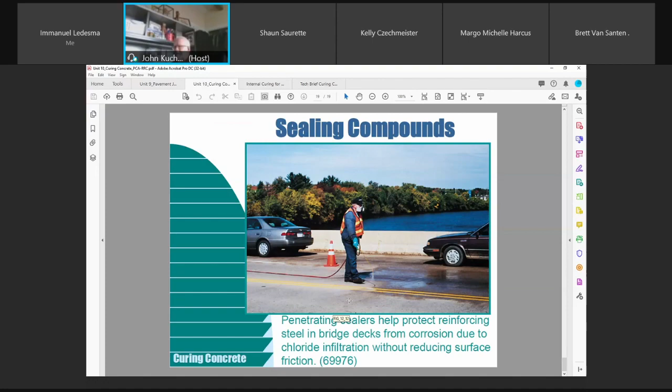And that's basically it for curing. But this, I just can't stress, it doesn't look like there's a lot of information, but it's key. It's key. And if you're ever out there, don't take it lightly. We spend so much time on testing concrete when it comes before the fact or during placement. But the most important part, to preserve your investment, the money that you spent on getting that pavement down, is to not have your concrete deteriorate prematurely because of something like curing not being followed.

Any money now is gone out the door. You sure didn't get a bang for your buck. And contractors are going to try and tell you everything. And sometimes the worker may not understand, the guy placing it. Sometimes as a young individual, he's been told, go cure the concrete. Doesn't know much about it.

So when you talk to the foreman or the contractor's contact on site, you've got to explain to him, you want that pavement covered with curing compound. You don't want to see gray. You want to be able to check his coverage rates. And like I said, that's very easy to do.

I mean, even your control joint spacing, it's easy to know. That's the width, that's the length between joints, this is my surface area. And at the start of any job, if you know he's anticipating a certain length of pour, before he even starts placing that day, talk to the contractor. Do you have enough curing compound on site? Because this is how much you're going to need.